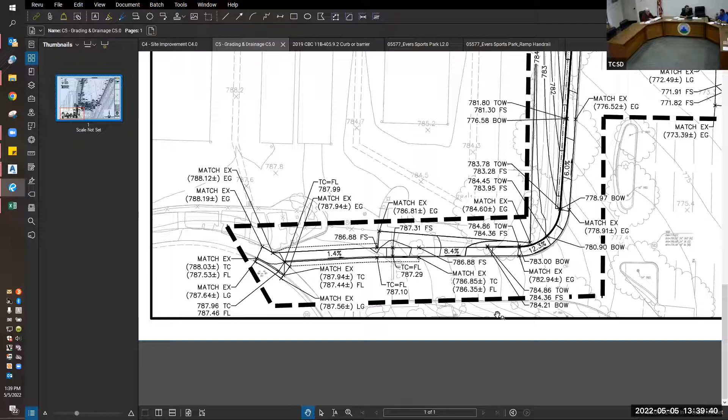When Brightview did the original conceptual design work, they took the position that maybe we could call this a roadway, so the sidewalk wouldn't have to fully comply. I didn't know if that was going to fly. Then when we engaged MIG, their strategy was a little different. They said we'll improve compliance at the parking lot, so from the ADA parking stalls into the park, we'll be 100% compliant. That was the approach taken with the original set of plans you looked at last fall.

The county has turned around and basically said neither of those concepts are going to fly. You've got to achieve ADA compliance from the public street into the park in order to do any improvements in the park. I'm probably ad-libbing this a bit.

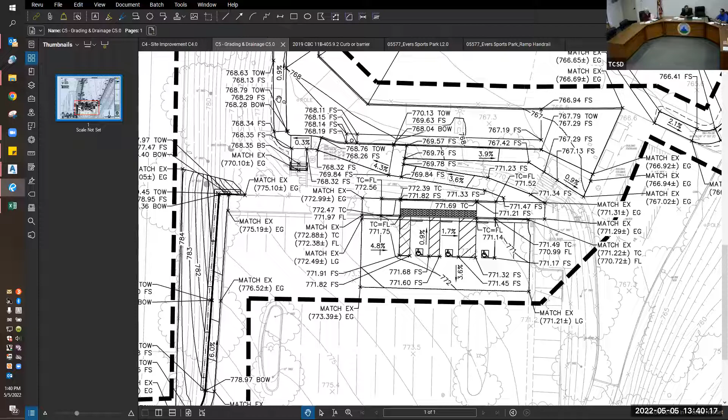The original plan was to put a sidewalk next to the existing driveway at the same slope as the driveway, with a curb and gutter, and then a raised sidewalk following the same slope down to the existing sidewalk, which terminates behind the softball field. That's the plan that was originally submitted to the county and was rejected or denied.

So the team has tried to review a bunch of alternatives about how we can achieve strict compliance from the sidewalk up on Gibson Street down into the park. We've attached some diagrams, and Vince will walk us through them.

It's difficult to see the changes on a couple of these because it looks just like a sidewalk, but in fact, in order to accommodate the reduced slope and these landing areas, it requires a pretty substantial change to the sidewalk. So I'll turn it over to Vincent to explain what is proposed now and how it will change. Gladly, and thanks again for pushing this up a little bit.

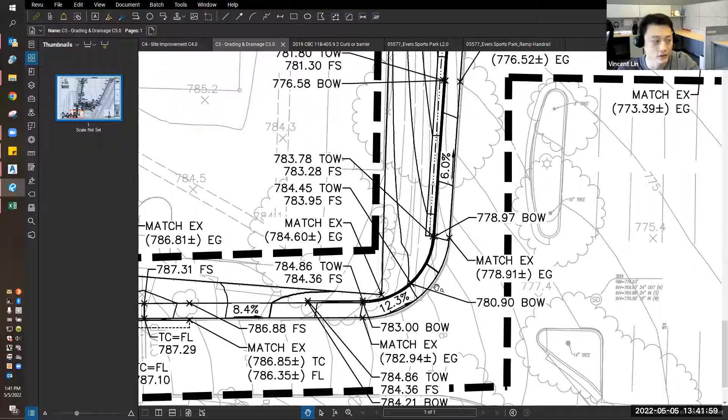We can get into the design. This is the earlier plan we were talking about, where this sidewalk was supposed to follow the grade of the driveway, which is at 12.3%. That's over the ADA compliance running slope, which is 8.33% if you're doing a ramp.

Ramps can't go on forever - they have to be in segments of roughly 30 feet, and then they have to have a level landing around 5 or 6 feet long, depending on how wide your ramp is. So we're showing a series of ramps with a level landing, shown in yellow, and we perfectly meet the desired elevation drop to get to the park with ADA compliance.

So this is what we're proposing. One of the major issues with this is that if you're providing a ramp, you have to have guardrails, and there's going to be a guardrail along both sides of this entire run all the way down to the green portion right here.

I have a 3D view of this, so it's a little easier to see. If you're looking at the plan we were just looking at, this green portion is the proposed, and the brown is the existing.

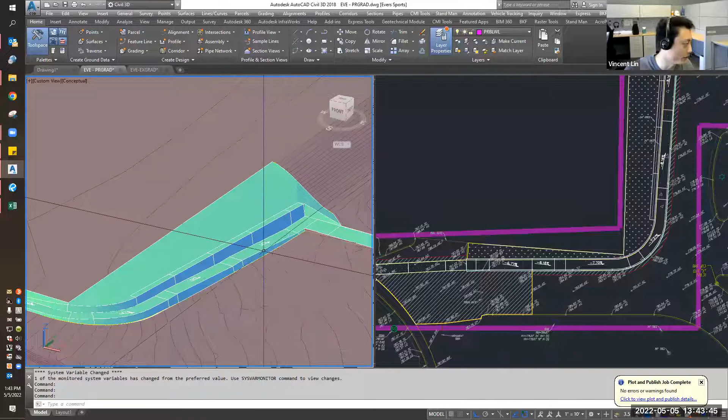To give you a sense of scale, there's a retaining wall on the left side of this walkway holding up that dirt and trees next to it. That's going to be around 3.67 feet tall at its highest point, right here. And this retaining curb we're going to treat as another secondary retaining wall - it's going to be at its highest point 2.62 feet tall, at this point.

So none of these are really too tall. They're not going to be over 6 feet, but it's still tall enough to be considered a trip hazard or fall hazard and require some retaining guardrails as well.

It probably doesn't look that different, but in fact it changes the way this is constructed pretty significantly. So we had a few concerns about this that we wanted to bring to your attention.

One is, because in the original plan we spec'd out a fairly narrow sidewalk, saying our primary goal was just to get separation from the street, from the vehicles, to the pedestrians. We didn't expect people in wheelchairs, or very many of them, to be using this anyway, but it was really for safety, to get separation from the vehicles for pedestrians.

So we didn't build it real wide, because we thought if there happened to be like two strollers, or a wagon and a stroller passing each other, somebody could just jump off the curb since it was only going to be 6 inches tall and let the stroller pass.

Well, once we went to this style of ramp, this sidewalk that was essentially an ADA ramp with handrails on both sides, we've lost the ability for people to get out of the way. It's going to feel like a tighter walkway because you've got handrails on both sides. Additionally, in order to accommodate the handrails, the whole sidewalk had to be made wider, about 1 foot.

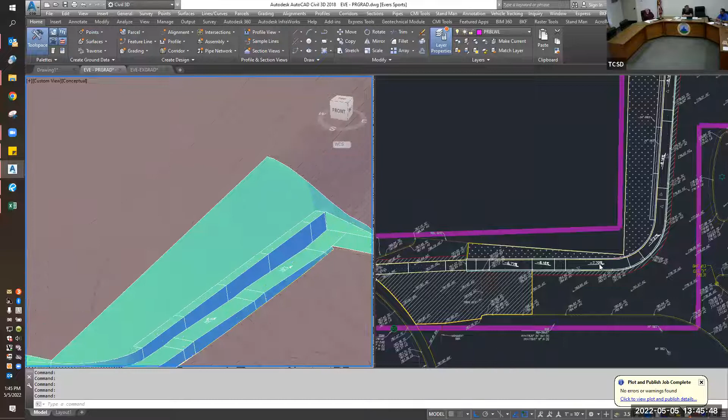And the roadway was already somewhat tight with two large trucks passing — already kind of a tight arrangement. Now it's safer with the sidewalk, because at least the pedestrians are out of the roadway, ideally. But the roadway is going to be effectively tighter.

And then additionally, with this really tall curb on the corner and the handrails, my feeling is the drivers are actually going to feel like you're losing more than a foot, because now the vehicles are going to have to scoot over further — it's just like driving next to a K-rail on the highway.

You just scoot over, right? It feels uncomfortable, you don't want to be near it, so you scoot over. So effectively the road becomes even narrower.

Now this isn't at high speed, no one's traveling fast, or there shouldn't be — it's a fairly short driveway. But we wanted to share that with you. Does that feel acceptable?

Before I go into what we could do about it — this change that's proposed right now, just to get ADA compliance on this section, is going to add about $130,000 in costs, based on the estimate Vincent worked up. We don't really know what it'll be, but that's the cost estimate because of all the retaining work, concrete work, and even some paving work at the top.

So there's a couple things that concerned us when we saw the proposal. One was, once you put these guardrails in, these handrails — Vincent provided a copy, included in your packet, of what it might look like. That's sort of the style of handrails, yeah, like that, but on each side.

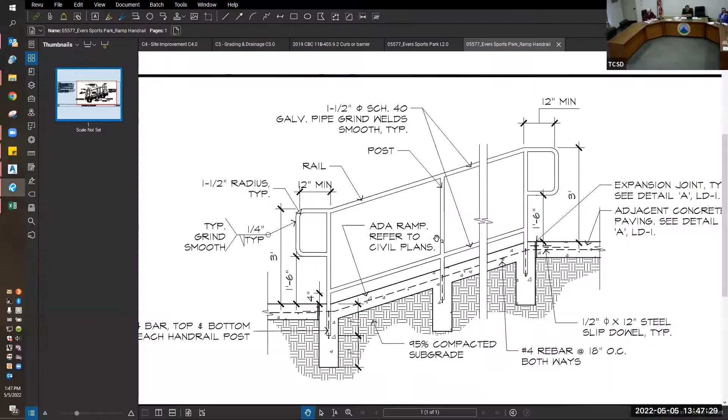You've kind of — we've really constrained the width of this, right? You can no longer step out into the roadway to let somebody pass.

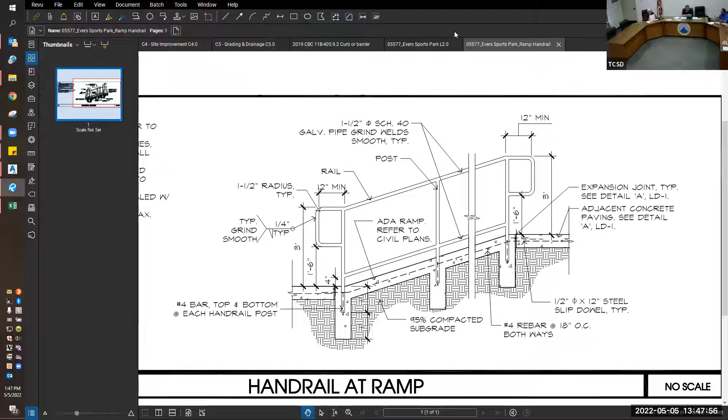We don't — in talking to Melissa, I have fewer concerns about people in scooters and wheelchairs getting down there than I do just the average pedestrian, which is gonna be a mom with a wagon full of soccer balls and chairs and kids, and these wagons are bulky.

So in this area here, based on what's been designed right now, two wagons won't be able to pass each other. I don't know how often that's gonna occur, but it is not ideal.

Ideally, we would have started out with something like this. So the original plan or thought was that we wouldn't have to worry about this, because we thought it was gonna be part of the whole driveway — we were hoping the county would allow it, correct?

My understanding is we went in originally with the position that we were creating fully compliant access from the ADA parking stalls into the rest of the park. But the county's position is more strict, saying that's not a public road, so we don't get to claim the exemption of just meeting natural grade.

It's also not natural grade, it's been graded to its existing location, so therefore we must achieve compliance all the way to the public street. This isn't because we chose to put in a sidewalk -- even if we hadn't proposed one, any improvement to the park would have kicked in the ADA requirement for this entry.

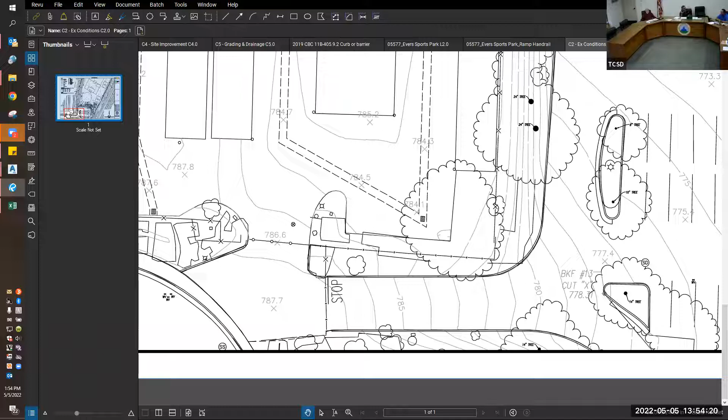So I'd like to see other options where if we could widen the area - we may have to spend more money, but at least try to do it.

So there's two issues then. If you could live with the width of the sidewalk and ADA ramp and just accept that every once in a while a wagon isn't going to pass a stroller, then the work to potentially widen the roadway could be done later, since it's all on the south side and wouldn't impact the existing proposed sidewalk or ADA ramp. However, if you want to accommodate both issues, we certainly don't want to build this new sidewalk and then decide it's too tight.

Our concern - I think we walked away from this a month ago thinking, geez, it is really tight. It will probably work, but we wanted to warn you of it. So how wide is it going to be?

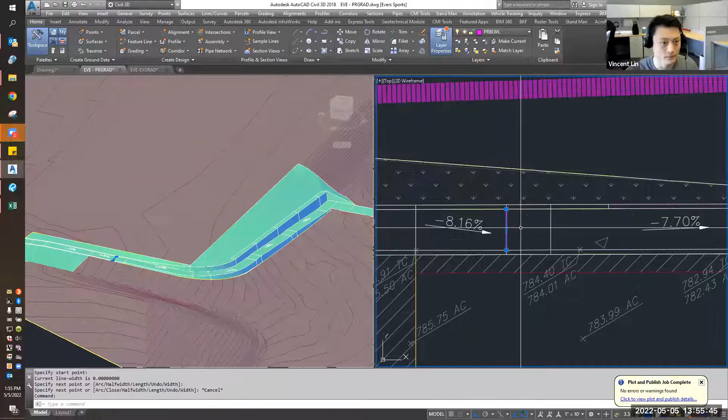How much space is between the handrails, Vincent? Right now there's around 4 feet. Oh, that's not that wide at all. That's pretty narrow. Well, it meets ADA requirements. So right now it's 4.5, but with the guardrails and handrails in, it'll be around 4.

Yeah, because barely 2 people could pass without any issue. You have to think about what ends up happening - I hate to use the soccer mom analogy, but that's what we've got. You've got oversized jogging strollers that are bulky, and these wagons, which are really common now, that are bulky. These aren't the little red wagons from our childhood - they're the ones you buy at Costco, they pop out, and they're 2 feet wide or something. They're not likely to pass in that area.

Just put one of those lights, you know - it just turns green, you go down. Oh yeah, the green, red - we play green light, red light all the time.

So if you're convinced that 4 feet isn't wide enough and it needs to be 4.5 or 5 feet, which would probably eliminate most of our concerns if it were wider, then the issue is the road is going to be 2 feet narrower unless we widen it on the other side, because we're really constrained on this one corner.

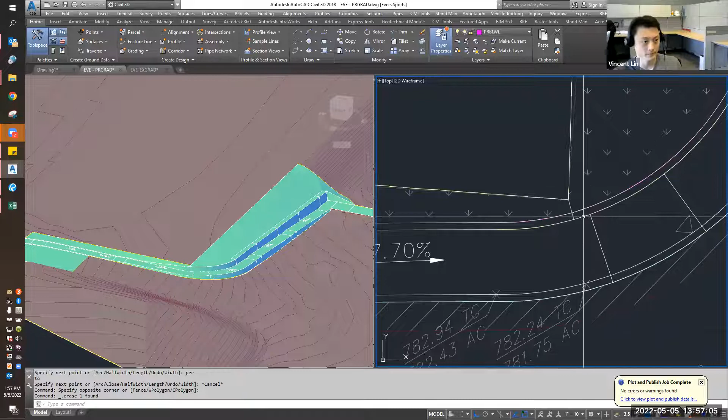Vincent, what you've shown there - we really can't do much on this north side of the driveway, right? Right, as tight as we can go, with that corner. If you widen the sidewalk and do the road widening later, are 2 monster trucks going to be able to go down and up without their mirrors hitting and all that stuff? That would be my concern about widening the sidewalk.

What's our existing road width right there in that yellow line, Vincent? Right now you've got around 19.5 feet. So here's the arrangement - a standard Caltrans road width is 12 feet per lane. Now this doesn't need to be nearly 24 feet, because traffic's going quite slow, or they certainly should be.

So at 19 and a half, you're under 10 feet per lane. That's getting tight - two trucks should pass but they'll have to really slow down. You're talking about like two F-350s with dualies - we have those, it's gonna be very tight. Somebody might have to back up, or at least get right over to the curb's edge.

How much would it cost to try to widen the road at the same time?

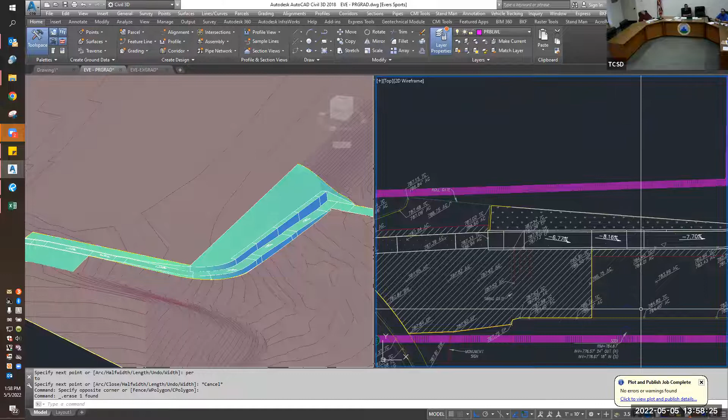So Vincent, can you pull up that diagram that shows where the infrastructure problems are? Yeah, this is the best I got right now. Okay, so this is the survey work. You see that circle on the bottom of the screen right by that fuchsia line?

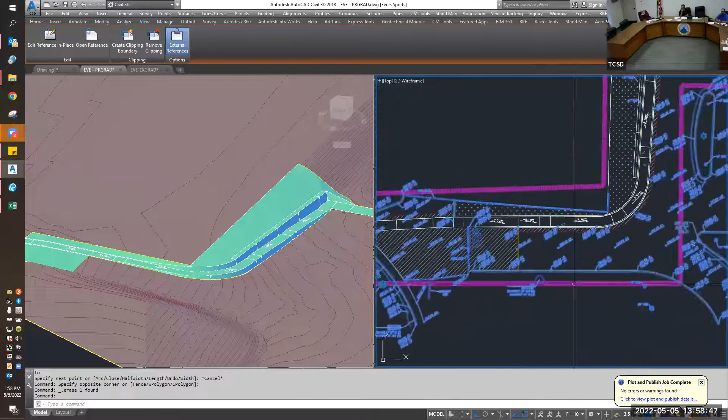That's a drainage inlet, and the curb for the road is inside the line. If we were to widen the roadway, say you're going to widen the sidewalk another foot, and then widen the roadway, at that point you might as well widen it 2 feet. You'd have to remove that DI and put it flush with the new road surface. And they'd have to allow water from- right now the DI is behind the curb. There'd have to be a curb cut. We'd have to work out the details, but you'd also have to do some retaining work.

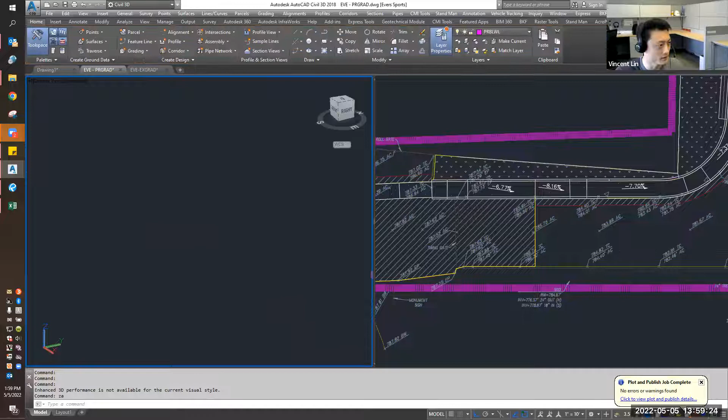Do you have a plan that shows the topography on that side? Yeah, one sec. Seem to have lost the... all right. Okay, can you see that? Yeah.

So I know we haven't embarked on a design that widens this out, but if the sidewalk were a foot wider and we wanted to regain the space we lost, so add like 2 feet at that point to the south side of the road, is there any other obstacles besides that drain that would require something as severe as a retaining wall, or is it just regrading? What do you think, Vince? I think the grades themselves- because your property line is relatively close to that area, you're going to have to retain it. Otherwise there's going to be a really steep drop that might not be 2 to 1, so that's not going to be compliant.

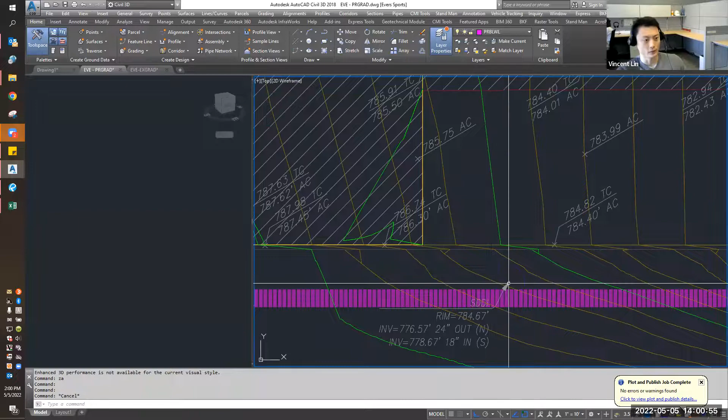We actually- our property goes quite a ways back. Our property line goes further than the fence line. Oh it does? Yeah, the neighbor put their fence over the district's property some years ago. In that case, we could regrade and then shift that drop inlet a little bit. I don't think we have enough information right now to know where that line is or where it goes. I think that's very important to know before we proceed with this step.

Would you have any- let's say there was nothing terrible with regard to where the line goes and it didn't conflict with those improvements- would you have any way of guesstimating what widening the roadway would cost us in addition to the 130 grand we're already looking at? For cost, yeah, no, I can't give you a cost off the top of my head. I could give you quantities, but not a cost.

It wouldn't- I don't think it would double what we've already talked about, the 130 we're already adding in, because that's a lot of concrete work and rebar stuff. So it's not going to be to that magnitude.

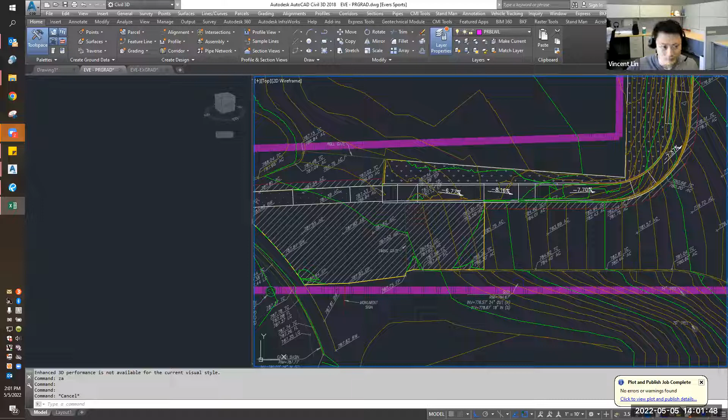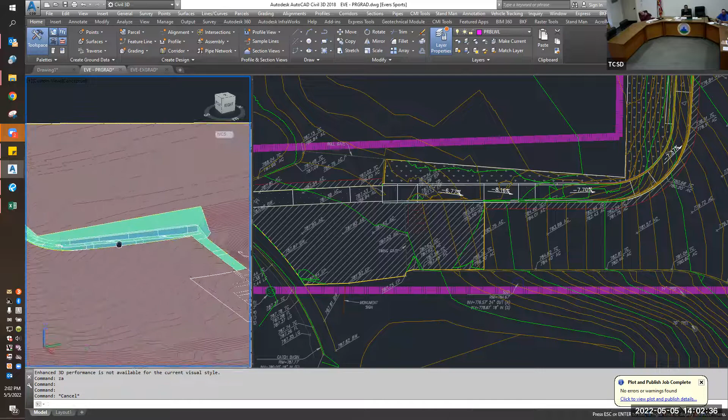Hopefully. Melissa, you're the expert here, what do you think? It's- the entryway is already narrow, right? And so going further into the entryway is certainly a cause for concern. Realistically, if we kept it at a 4-foot sidewalk for the ADA ramp, I think there are alternatives to having the cross traffic or head-on traffic. We see a lot of families drop somebody at the bottom of the parking lot and leave all their stuff there and come in and pick it up, and I see that more often than not.

Because nobody wants to lug their stuff all the way up, so I think it's doable. I don't think we should stop the project because it's cost prohibitive. We're going to have to deal with this if we do anything to this park. It's a tough one for me because it's already such a narrow entryway. I think we can work with it, but it would have been more ideal to widen on the south side in the first place, you know what I mean? It is our property.

And to add that 2 feet to the south would be ideal. I would see more benefit to having a 5 or 6 foot sidewalk and 2 feet to the south for the roadway expansion than anything else we're doing, honestly- not in the park, but for the entry, for the way the park is used. I think there's solutions to everything though. The community's already used to not having enough parking and enough space in there, so they deal with it as they deal with it.

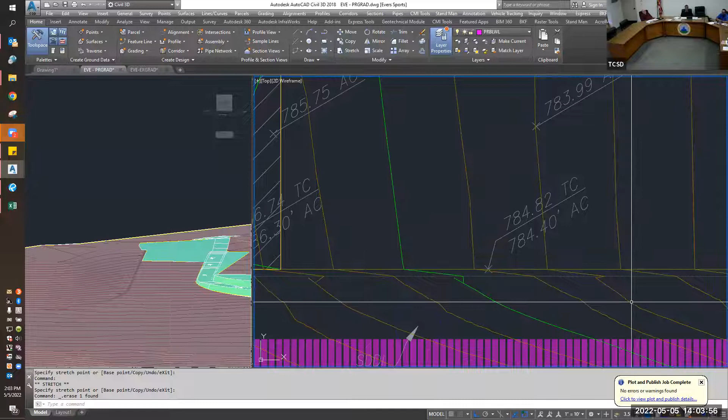So I think it's all workable, right? Ideally, I think we could deal with a 4 foot sidewalk. A 4 foot sidewalk with the rails is 4.5 feet, but with the rails it's about 4 foot of usable space. My concern is we came up with this nice plan, and now we're postponing it for a year, which means the costs are going to go up, and I'd guess it's probably going to be extended more than that.

So I kind of agree with you. We've been living with this since before I was born, which is a jillion years ago. Fair, and I'd like to see what you said, but again, how much is that going to cost? How much is it going to take away? We're already going to have to, as I see this, postpone something we had originally planned because of the additional cost.

You know, I'd like to see that whole picture before I decide. Extend the sidewalk 2 feet, extend the road, but if we had to forget the children's park over there to do this, I'd say I'm not sure I want to do that. So there's a lot of stuff, I guess, that I don't know. Well, I think there are some alternatives.

For example, what I wouldn't want to do is spend this money to build this sidewalk only to regret it forever, because it's too narrow and people end up back in the street. Because what's going to end up happening is if it becomes too narrow, if it feels too narrow, people are just going to walk around it. They're going to drag their kids or drag their wagon around it, and we're not solving the problem we have right now, which is people in the roadway.

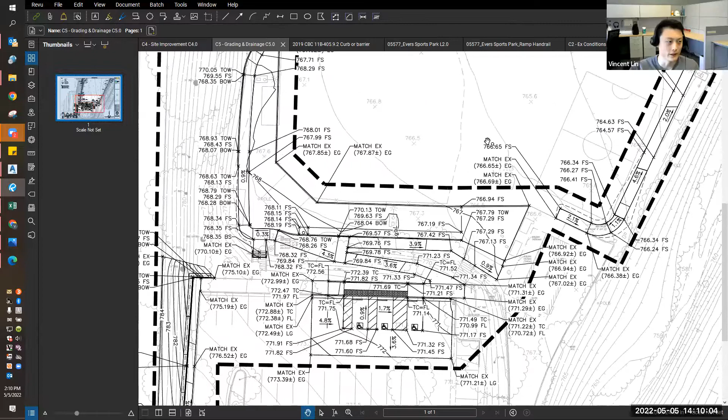Right, but if we're not touching this, you mean abandon the sidewalk altogether? It would be either abandon the sidewalk and put like a 4-foot stripe for people to walk on, even though at 12% it's not ADA compliant at all, but it's a stripe for pedestrians to use if they wish. Right now you don't have ADA access to the park from the public right of way, and if you're not improving that, it's a little gray area. If they allow you to not touch it at all, that would be the ideal way to go.

I just asked that question. Tina has worked with Holly, one of the other consultant members in the county, so I don't have first-hand information, but my understanding was the county's position was if you're going to make improvements in the park, you have to achieve ADA compliance to the public street. That's always been my understanding.

So I think if we didn't, Vincent's alternative of just dealing with this with paint or something is viable, because it would actually save a lot more than 130,000. But it was one of our goals from years ago for this park.

So ignoring the ADA issue, we have this concern that there's more going on at the park than they can park for. So 40 or 50 cars park out on the street or more, and those people walk in, sometimes right down the center of the road with trucks passing by.

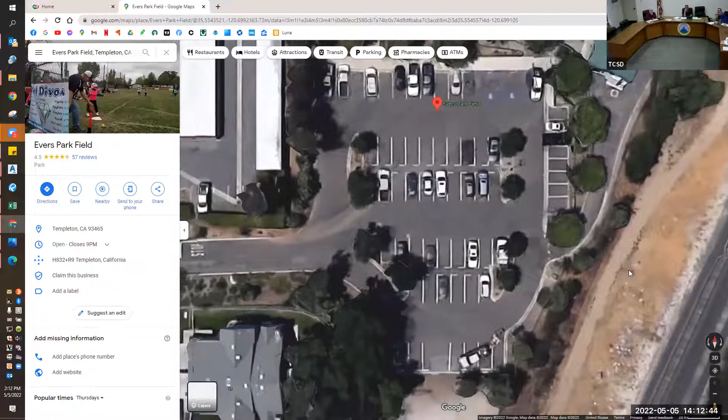There's probably parking for 65 cars or something like that down there. And then we have the overflow down below at the bottom, not really shown on the screen. And then we're thinking of widening the road on the south side, so how far, where is our property line?

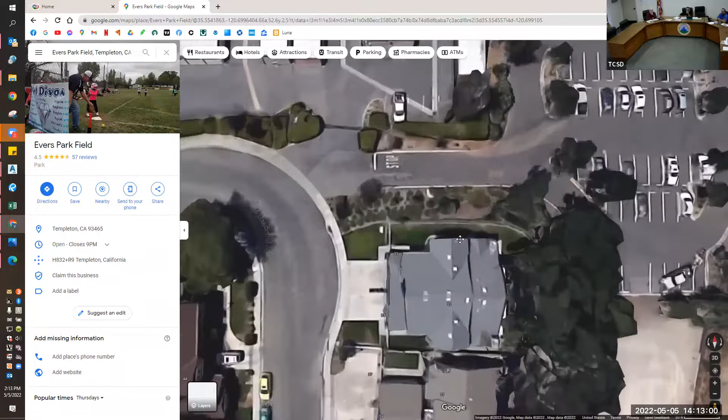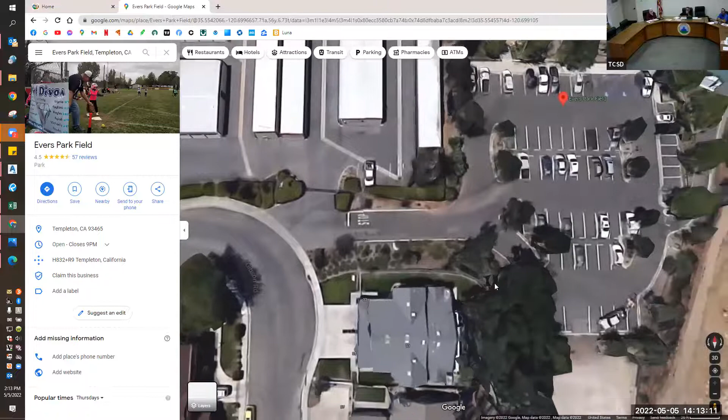Zoom in right where your cursor is. Can you get a little tighter, Vincent? It's kind of bad quality, but our property line is up in the back, those trees, the first tree is in our property, even though the fence goes around it. So that whole dirt area is in our property line.

But it's steep, especially in the back. So technically speaking, widening the road's going to add costs. That's the curve coming in at the bottom, so you can see the slope. Nice pictures - I'm glad you had access to all that stuff quickly.

Again, I would prefer not to do anything, because ever since I've been involved here, we've talked about making that better, a driveway and a walkway.

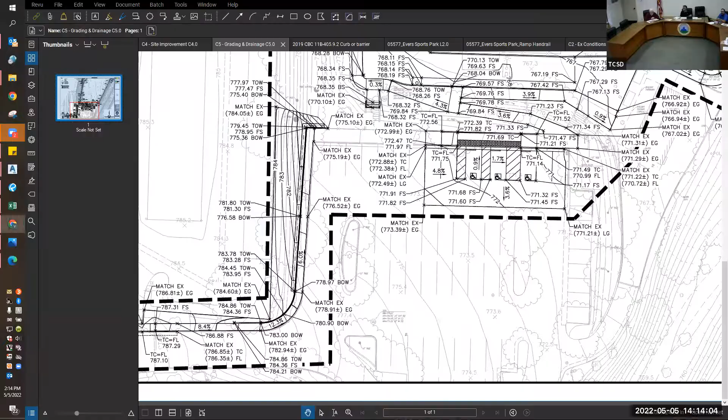Whatever work we do in the park, the county is going to say you have to become ADA compliant on the driveway and so forth. So I think the issue is, if you're concerned about the sidewalk at 4 feet being too narrow, the time to make it wider is before you construct it. The roadway could be postponed, it'll be inconvenient for drivers passing 2 large trucks, but that could wait without affecting the rest of the work. If you proceed and later decide the sidewalk's too narrow, you're almost starting over.

I personally like to see the sidewalk wider. Even if we could do 6 feet, I'd rather see that, and then deal with the roadway separately. I'd say consider widening the roadway, send it out for bid, see how much it is, and then we can make a decision at that point. But definitely I think 4 feet is narrow.

For people passing through, it's just going to be narrow, that's my feeling. These wagons that I see, 4 feet's the minimum. 2.5 feet are your wagons, right? Something around there.

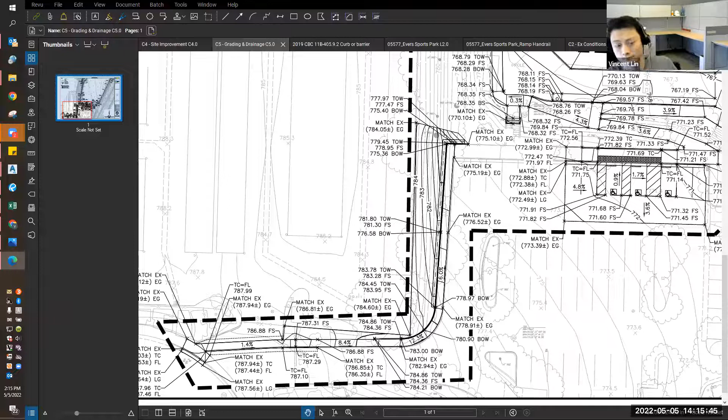Well, this one I'm looking at right now is 22.5 inches wide. And they're just a bunch of different sizes, some of them are bigger, bulky, big. Here's a collapsible wagon that's only 17.5 inches wide - that would fit theoretically.

I don't see going from 4 feet to 6 feet as a big deal, because normally what happens is somebody sees someone coming with a wagon, and even with 6 feet, they're probably going to wait till they get down before they take theirs up.

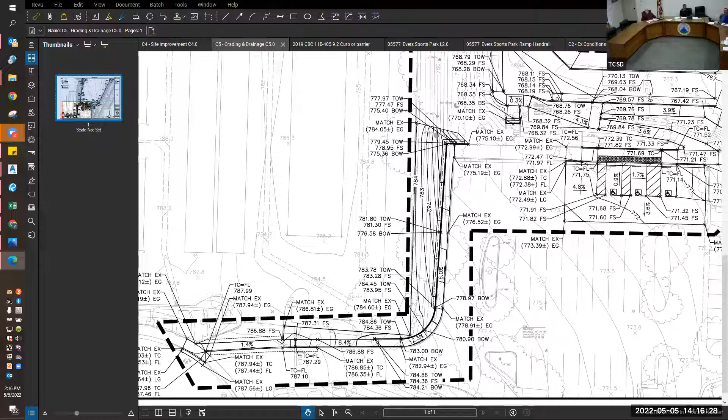The issue is this handrail starting - I don't know if you can show right here - there's going to be a continuous handrail from midway down the slope. It goes around the corner, so you can't even see the bottom side - there it is right there - so you wouldn't be able to see who's coming down the hill. Over time, I just feel people are going to start using the roadway instead.

Here's a wagon that's 24.5 inches wide. I think the 4 feet is too narrow for 2 wagons, too narrow for 2 strollers, narrow for 2 people.

I think if you're an able-bodied person walking on a regular sidewalk, let's say it's a 36 to 40-inch sidewalk, usually one person kind of goes to the edge or steps off. But you can't do that when you have these guardrails - you can't hop over the guardrail. At 4 feet, somebody your size could go by, even if they're big and fat like me.

I think 4 feet's fine for a couple of people passing each other - it'll be tight, but they'll fit. It's the equipment that's the issue. Right now the wagons are pretty popular for these soccer moms, and I think we'd feel like this failed if those people were hauling the wagons down the road instead. We'd be asking, what did we accomplish?

Yeah, I think since we're pouring concrete, we're never going to be able to change that, so we might as well do that part right and then figure out the roadway, because we'll have the option - we have the room.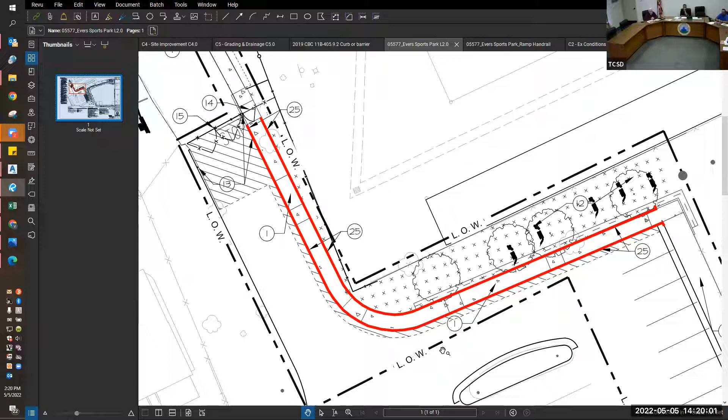So in your mind, it needs to be bigger than 5 feet? I think 5 feet might work, because we're looking at the handrails, it's not gonna be slatted, where if something's wide in the stroller, it could stick out. You got poles. Fair. I mean, they have to figure it out, the ones who had kids and put them in programs.

The skateboarders come on top of it. Oh yeah, they ride in the roads, it's no big deal. They're not risk averse, those skateboarders.

I think 5 foot would sort of accommodate the 2 wagons, with some high fives on the way by as people go in opposite directions up and down the same ramp. And it would leave us a little, even just a foot of space for those trucks, because realistically, we live in Templeton, right? We're talking about, you either drive a Tesla or a big truck, mostly, or a white minivan, there's a lot of Honda Odysseys around.

But again, if we go out for bid and see what the costs are, at that point we could see the risk to benefit type of thing. Absolutely, well, except for, we're only gonna have one design on the sidewalk.

And I don't know, are you suggesting that we could have a 5 foot sidewalk and a bid alternate for a 6 foot sidewalk? Or the whole thing would change? I guess I wanna make sure that we don't get too crazy, because we're gonna have to pay for all this design work, whether you build it or not.

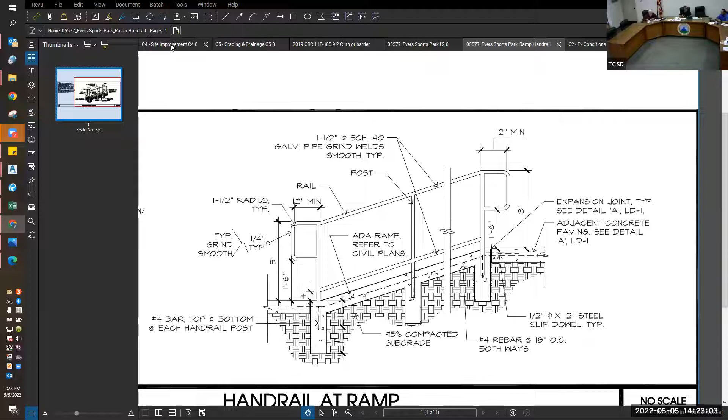100% correct. I mean, we're also changing the purpose of the park as well, right? We're adding a playground for all kids, handicap as well. And we were hoping this could become an area where people could go for a walk. So we are trying to change the purpose of the park. I think that the big issue is this ramp.

It's the soccer and softball Saturdays when the sidewalk is mandatory. Otherwise, there's always parking down there, even with those, except for on soccer Saturdays. We have, I think, 60 spots, we can accommodate a lot of cars.

So this sidewalk, these strollers, now obviously the ADA component's separate, but the separation from the vehicles to the pedestrians is only, in my view, really needed on soccer Saturdays and softball Saturdays.

Even with additional amenities, it's more passive use and it's not going to fill up the parking lot the way organized use does. So a mom bringing kids down to play at the playground on a summer Wednesday is not going to have anywhere near the impact, compared to soccer Saturday when we turn Evers into 7 soccer fields starting on 15-minute staggered start times, for 6 hours at a time. The way we use that park is staggering.

It's never going to hit those numbers on passive use. Even the coolest playground on the Central Coast will not gain the kind of use we see on a soccer Saturday, the sheer numbers. We have 200 people down there playing games, plus parents, so it's really the soccer Saturdays that are the impact, nothing else. None of the other days concern me with any of these issues. It's only the program days - any other time you're not going to have cars lined up trying to get in at the same time. Even when we were doing movies in the park with 200 people, it would look empty. It's really the organized use during those heavy traffic times.

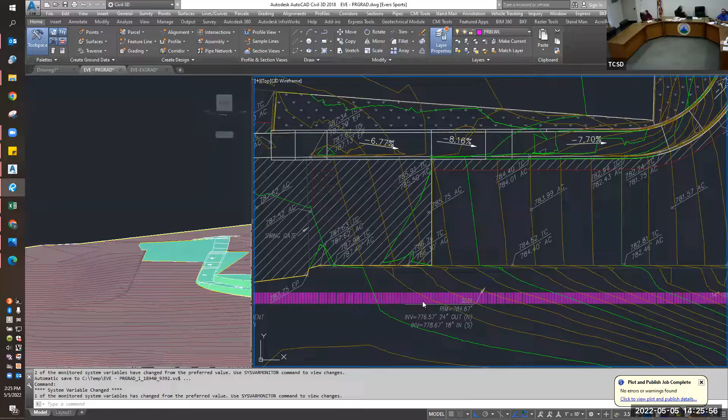Is that long? Sorry, can you say that again? The length of the driveway before you get to the parking lot from the cul-de-sac, or from the street - that's going to be narrow? The whole thing would be narrow. So you're saying from over here all the way down to right there? Yes, it's 147 feet.

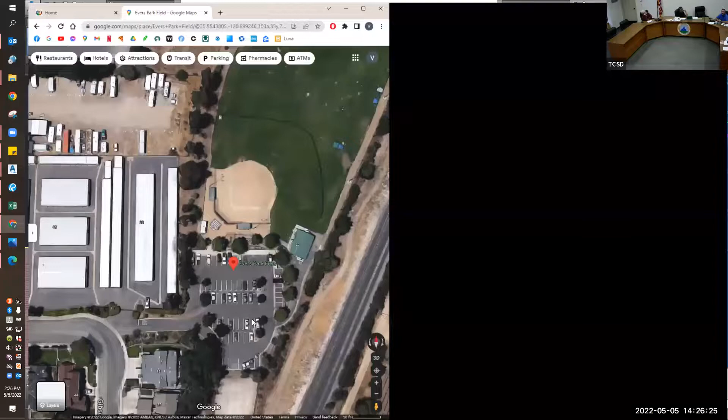Because the sidewalk, whatever width we pick, will be the whole width from top to bottom. I just thought down the hill it widens before we get to the parking lot. You can bring up an aerial real quick. It opens up because of the way the curve goes. The other thing, realistically, while he's pulling that up, is where that part is.

The way people use the park - if you look at the west side on the lower end where the ramp would land you, that's not high traffic, where those trees are along that long white area in the middle of the screen. The entry to the park is where all the traffic is, with pedestrians and 2 cars coming in at the same time. If you're coming into the park on the left-hand side, that's not a high traffic area. So the stroller or wagon situation there is much less concerning - someone can be in the parking lot and it won't matter, because that's not high traffic.

We guide cars around in a circle, starting in a counterclockwise way - it's all coming to a head at that entry, that very narrow entry to the park. So really that is the biggest concern, when they get around that corner. I think that's where we have to be most concerned about having like a 6-foot sidewalk, a 4-foot, or a 5-foot sidewalk. As we get down into the park and make that left-hand turn, people walking along that space are rarely an issue, because it's one-way traffic. It's when we get in and out of the park where we have two-way traffic and pedestrians, for the reality of how it's used.

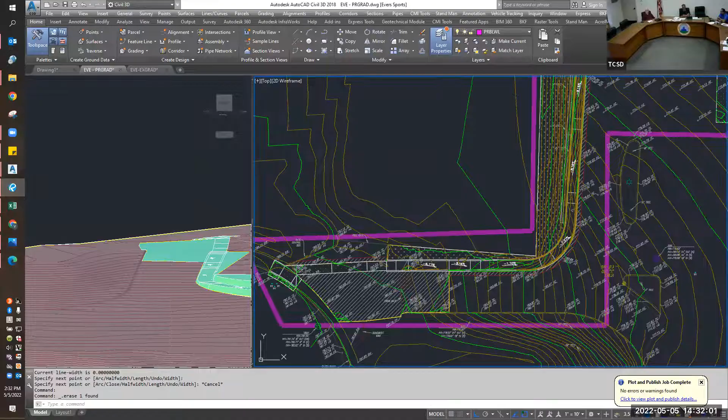All right, well, I said we should try to do it properly because it's important to get into the park - safety is important, traffic. So I say let's widen the road, get an estimate to widen the road, and also widen the sidewalk. Let's do 6 feet to see what it's gonna end up being. Okay, so here's the deal.

If you do 6 feet, then you have to do the roadway work. Yeah, we're gonna lose... there's no way. Well, let's just see what it is. I hate to do the sidewalk and not be able to use it properly.

So he says the roadway has to be at least 25 feet anyway. Well, no, it doesn't. We've already compromised it - it's not a public road ideally. What ends up happening is the narrower it gets, the more uncomfortable it becomes, and actually there's a whole theory about designing roadways narrower and narrower so it slows down traffic. But in this particular case, because there's nowhere for those vehicles to go, the narrower it is, it's inconvenient at best - we're gonna have other issues too. The narrower it gets, the more likely these handrails get hit by cars, the curbs get hit by cars, we get claims, whatever. I feel like we have no choice but to widen the road.

That's my concern, and as you said, it's just going to feel narrow. I know we're trying to save money, but we need to find other places to save money. This part is the infrastructure, that's how everyone's going to be getting in and out, and that's where the major traffic area is, and the safety. So I said this part needs to be done properly. Let's see how much it costs to widen the road and widen the sidewalk.

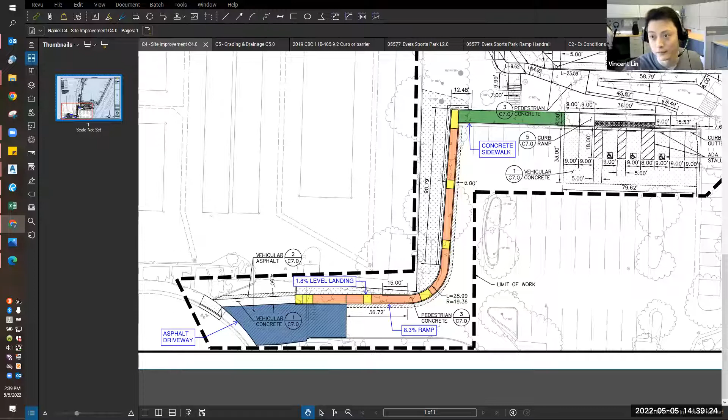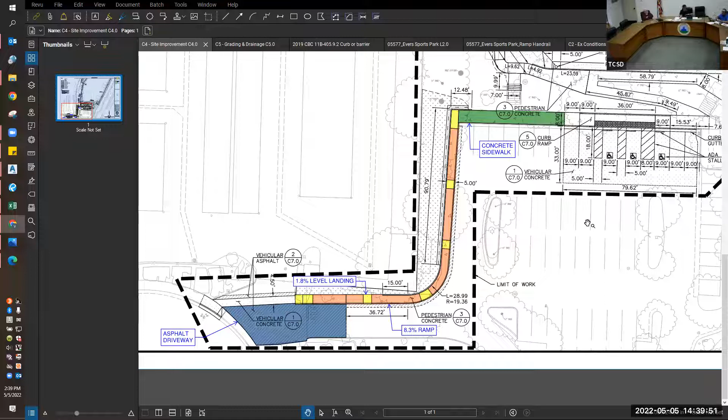Okay, all right, and then it'll add some extra cost to the engineering scope as well, right? So we need to address that too for when they send the bills in, for engineering and all. We good? Are we all good? Anything else? We good on this Evers Park item then? Yeah, if that's all we're gonna talk about, we're good. I'm good, at least you're good, okay. All right Vincent, thank you very much. Thank you all, thank you Vincent.

Okay, see you guys. Okay, so now let's go to refuse rate update, public hearing. I just wanted to do that at the very end of March, and we spent a lot of time going through all the rate calculations. The committee directed us to proceed, although there were a couple of rates that still needed some fine tuning.

I just wanted to point out that since then, we've sorted out those rates. They fall into this organics recycling category that you see on the backside here - those are the ones that had a few errors. We found a couple of other places where there were just some very minor changes, like the roll-off calculations, and on not core services, but just a few things that we resolved with the mid-states rate consultant, Justin, and sorted those out. Then we prepared this notice and it went out in the April utility billing.